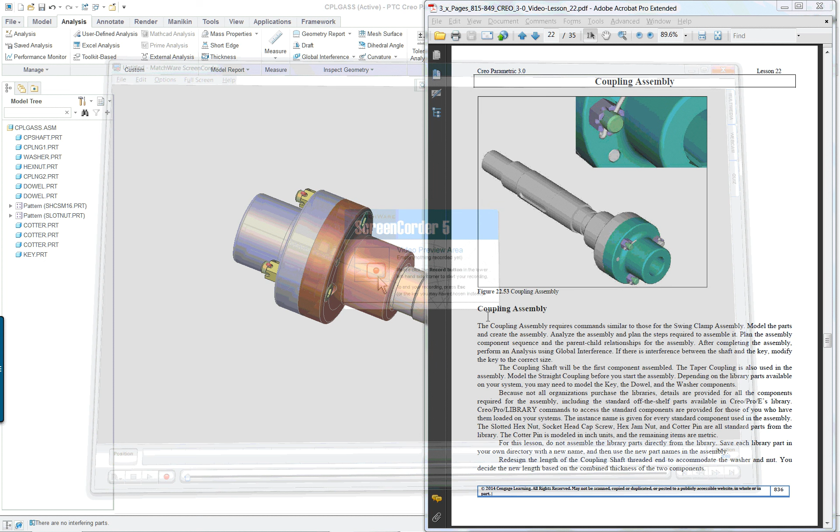PTC Creo Parametric 3.0, Lesson 22, Part 6.

In this lecture, we will cover how to do the coupling assembly. I've got it on my screen here, but one of the things we have to note is that some of the parts you created, which are the three main ones, and other ones are taken from the library of parts or from the CAD resources site. Either way is fine, but you should learn how to do at least the one from the browser and the 3D part space.

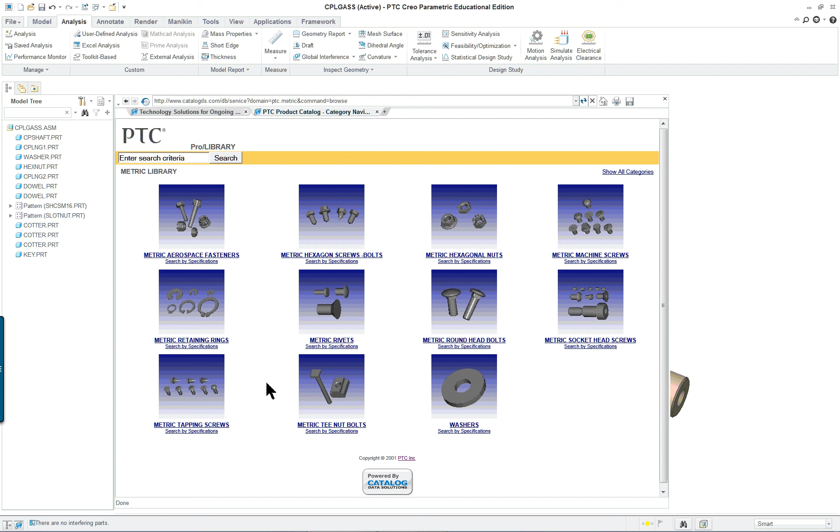Basically, we are going to be taking the parts from the metric library if you want to do it this particular method, and then you're going to select the category that you want to work with, washers, whatever it is. And if you look in the PDF, you'll see that the jam nut and the socket head cap screw, the actual path is given to you here. If you follow it along, you should be able to pull each one of these parts out.

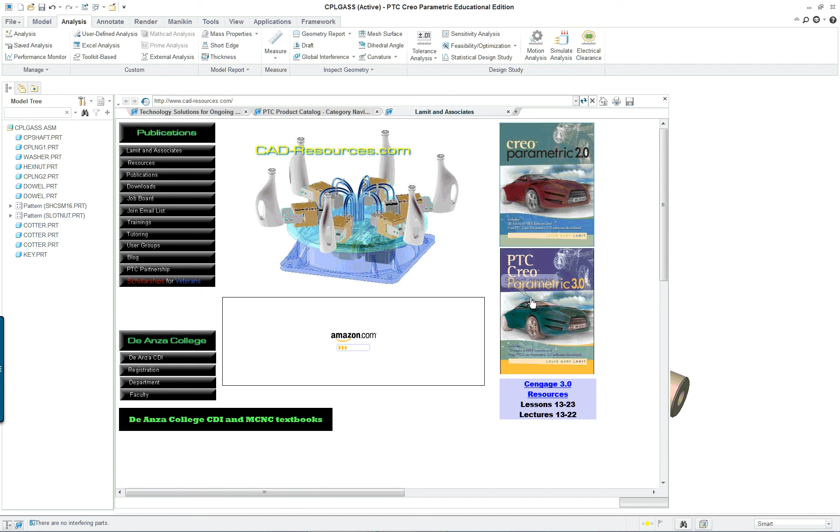Now, that's one method. The other method is maybe a little bit simpler in the sense that it's all in one spot. In the CAD resources site, go to it, click on the book cover, and click on the assembly exploded view of the coupling. Take this and extract it to your working directory, wherever that is. You'll see that those components are there for you to work with.

Alright, so I already have it in session and the components have been assembled, so we're going to take a look at each one of them individually, and in some cases we'll just redo it and see what we have for our options. One of the first things you want to make sure is when you put it together that you do an analysis at the end of it.

So we'll work kind of backwards here and we'll do a preview and we'll see if there are any interferences. There are no interferences. So as you do your assembly, you might want to run that analysis every once in a while to make sure you're getting the components in there correctly.

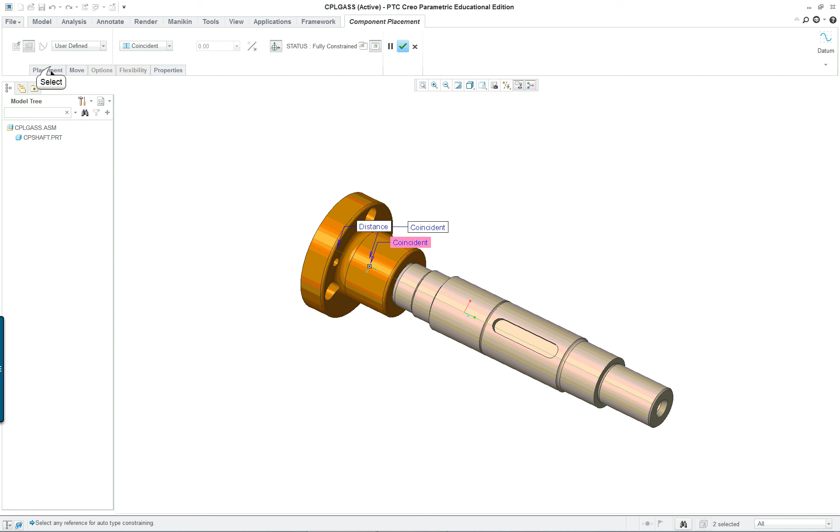The first component that's going to go in the assembly is of course going to be the shaft, and then the second one is going to be the taper coupling. So let's go and edit the definition of that one and take a look at the constraints that were used for it.

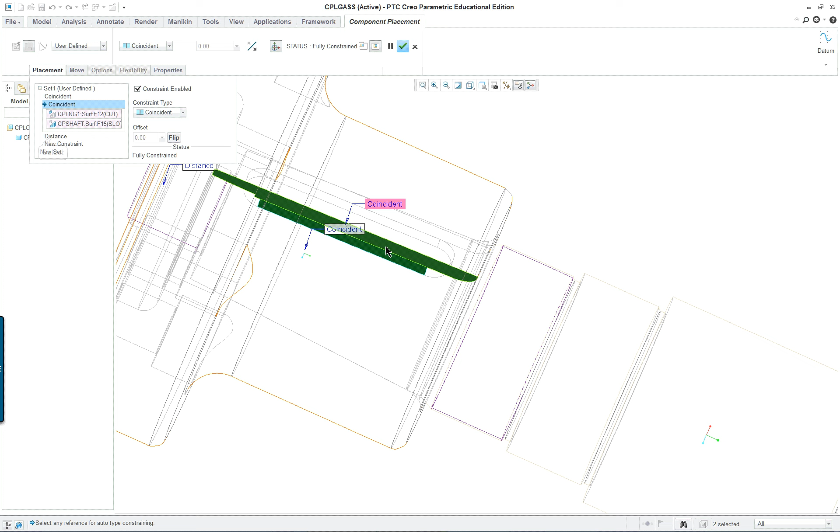Change this into hidden line, and you'll see that the first one is coincident, which are the two tapered shapes coincident with each other. Then you have the key seat coincident. And then you have a distance one, because we found that we can't get this in there unless we have a distance. Now this is going to be put in there and then eventually screwed down. There's going to be a nut here on this end. So in reality, it doesn't have a precise fit in that sense.

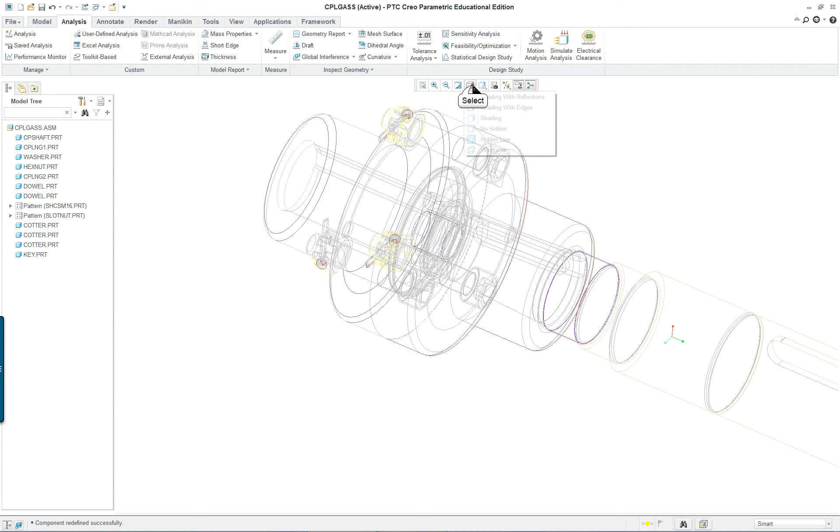So we looked at those, and let's put them on our own. We can do that by taking these and suppressing them, like so. So it's probably a good idea to have your tree filters so that you can see your display items here and maybe suppress them also. I have everything turned off, so I don't have any of my datum features shown.

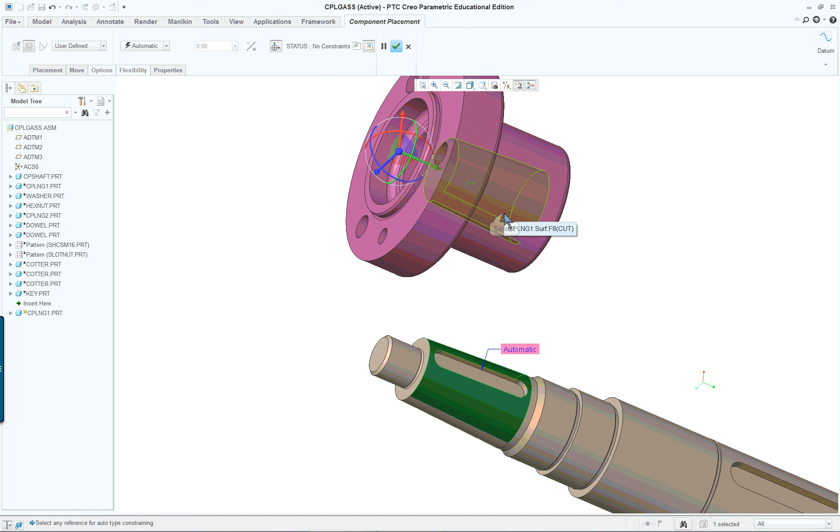So let's go to the model. We're going to assemble the coupling number 1, which is what I called it here, the taper coupling. I'm going to click on the face here for the taper area, and then with my right mouse button filter to the same thing on the coupling. That's one.

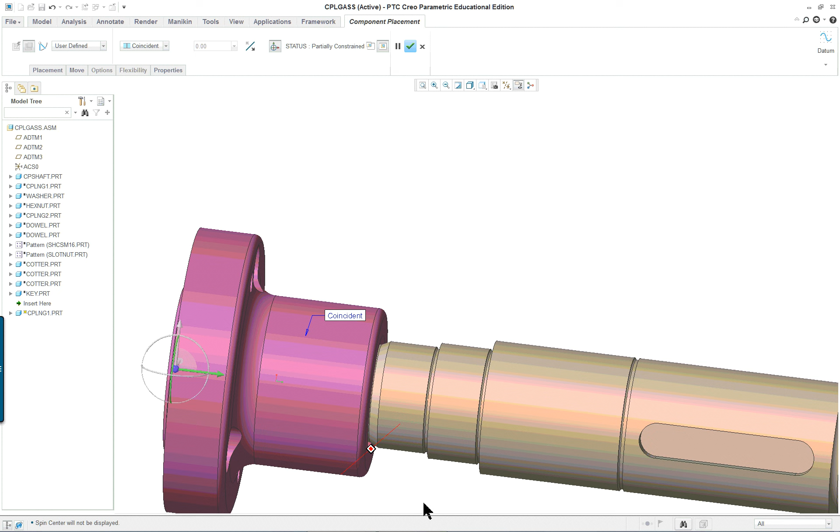Okay, now we also have to index it. If we look, we can see it's not going to go on there perfectly. Now I'm going to turn off the spin so that when I rotate it, it'll rotate right about that position. One of the things I could do is drag this out, but the funny thing is that the coincident constraint doesn't seem to attach itself very well, conical shape to conical shape, or taper to taper.

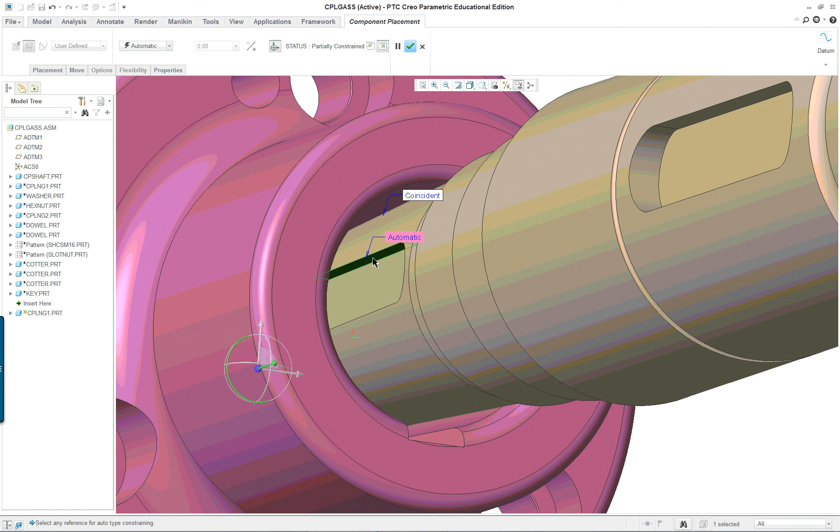So I'm just going to drag this out and take a look, and you'll see that there are two key seats. So we're going to add a constraint to this surface of the key seat and to the one inside here. Let's see what we get when we do that. We got normal, so let's try parallel.

We'll see that they do line up at that particular point. All right, so we have that one in there. We're going to want to add one more constraint here, from the end face here. There's a variety of places we could go to. Let's pick the very outside so it's easier to see.

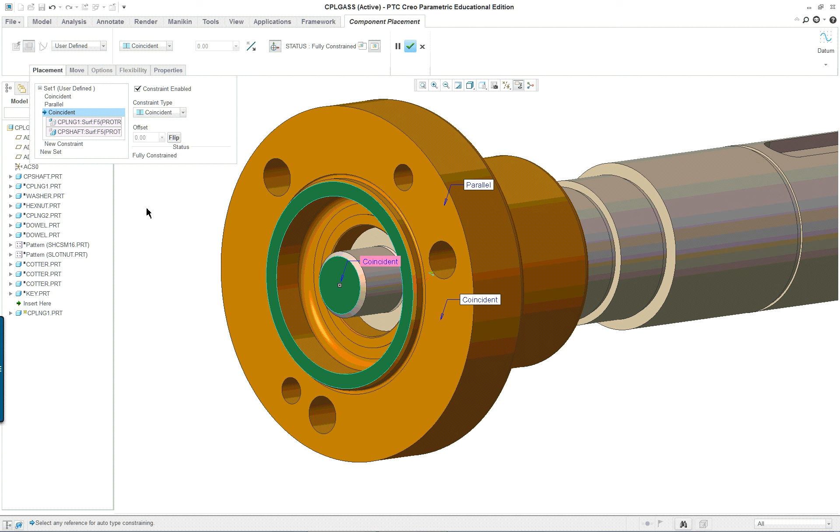Now, if we stop there and did an analysis, we might see that we need a particular distance. So I'm going to go into the tools, into the analysis and global interference, and see what we can come up with. Well, it's not giving us any interference, so we're kind of lucky at this particular point.

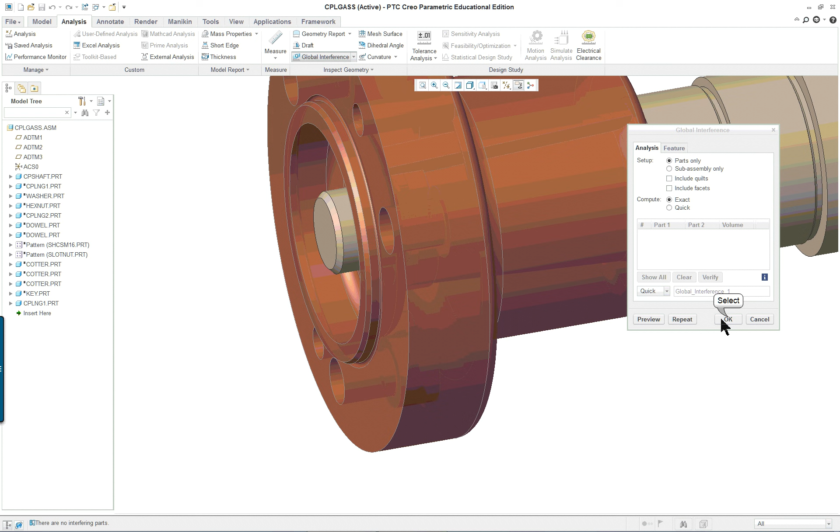If you do get an interference, then you must add a distance to it. In other words, change it from coincident to distance. So I'm a little surprised that that worked out so well. What I want to do is visually test to see if this is working.

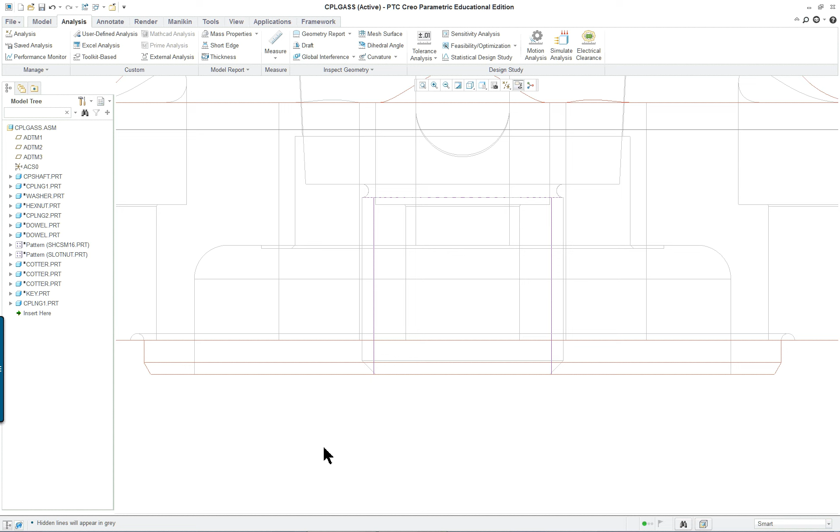And I'm going to go in and click on front, and I want to zoom in very, very far to see whether or not - where the two items meet. And you can see right in here that it does have sufficient room and it's not intersecting.

So again, you'll do this analysis, and if you do have a lot of red showing up, then what you want to do is change the distance or add a distance to it.

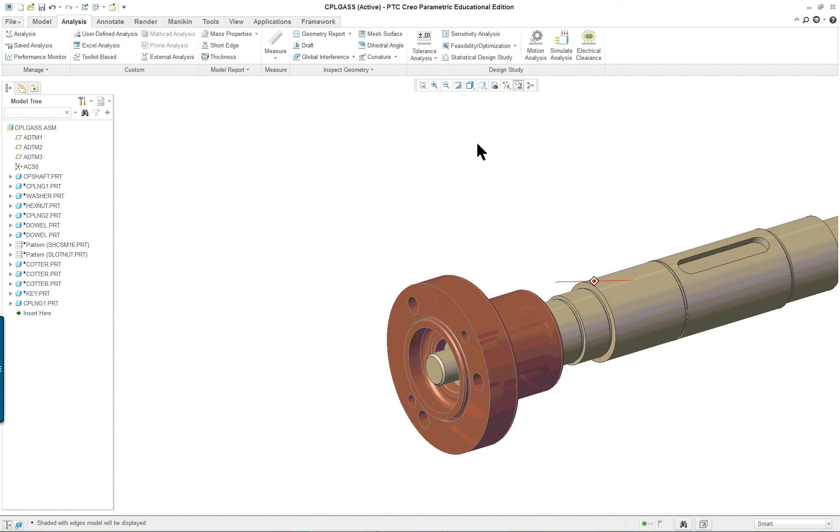All right, so let's move it around a little bit. And the next one we could put in - I'm going to go around up in here. Let's say we want to go and put the key in up over here.

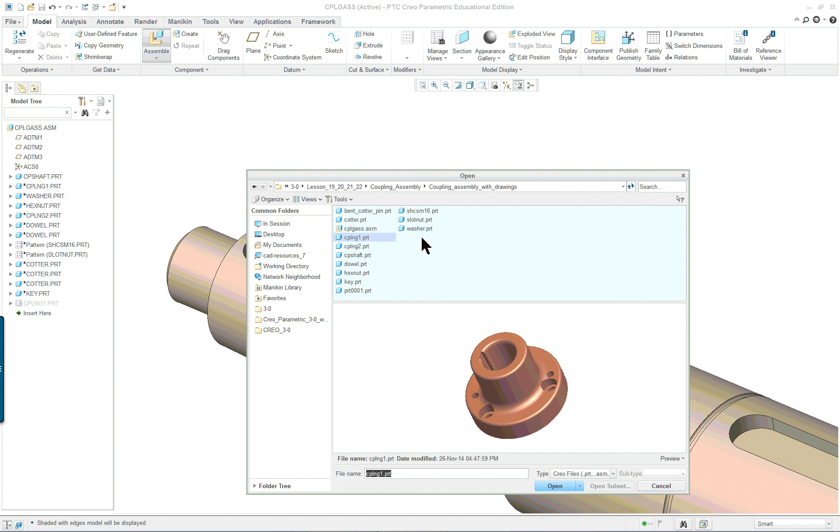I'm going to just click on this and hide it so I don't have to deal with it in front of me. And we're going to go to Model and Assemble, select the key, and the key - I'm going to pick the face here and the face here.

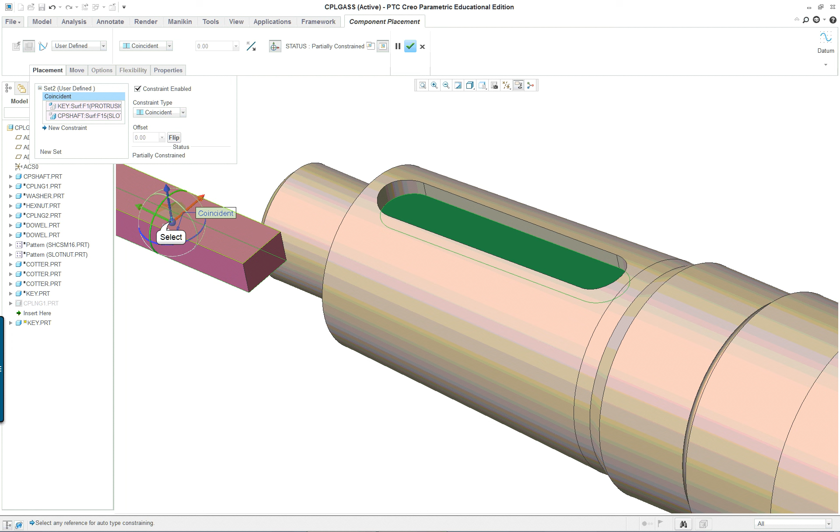Let's make those coincident, and let's flip it, see where it is. Okay. All right, just move it over in here a little bit.

So that's coincident. And let's add a new one. How about this face of the key to the face of the key seat? That's also coincident. Let's add one more.

We want to know where it's going to slide in here. Let's change the filter to edge and click on the edge here. Let's see if it'll pick the edge. There's the edge, using my right mouse button. You can go down and change the filter instead. And that one's coincident.

And again, in every case, you should see whether or not these are properly sized. And we'll run an analysis, global interference, again. And it looks like it's okay. All right, so that's our key and our coupling.

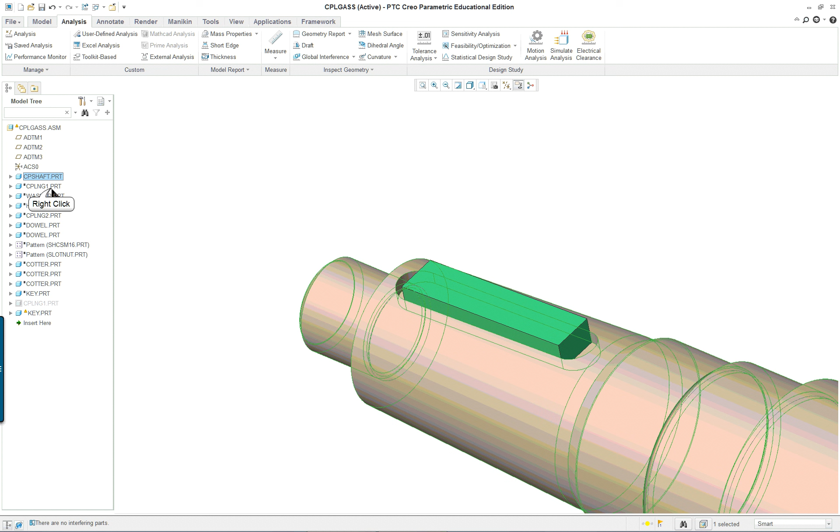Let us - where is my coupling? Let's unhide it. Rotate it around. And let's put on the washer that goes in here.

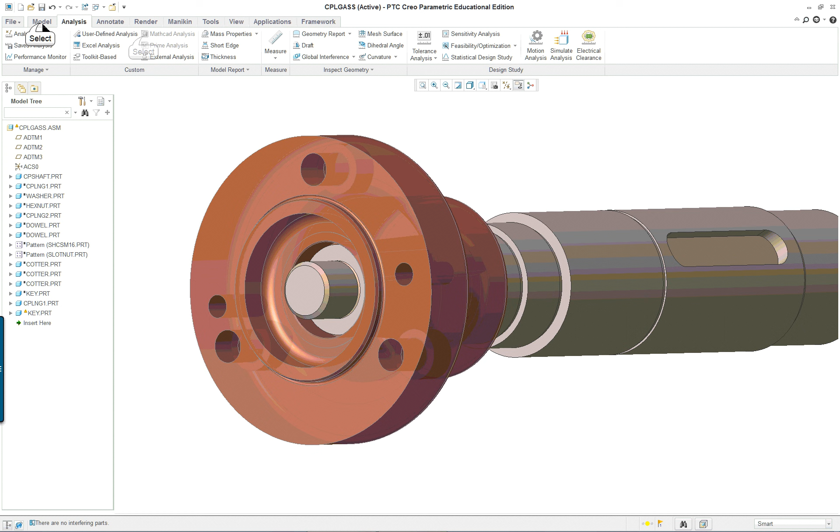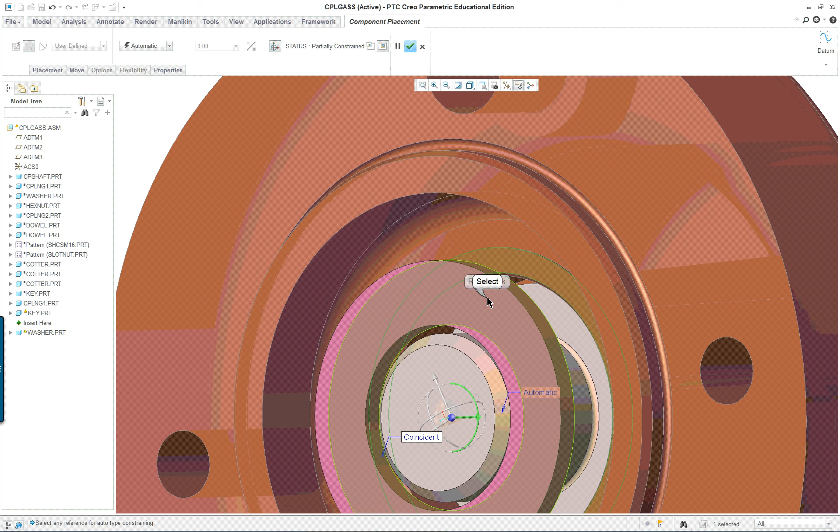And I'm going to select the curved face inside and just the threaded area here. You'll notice that it's very sloppy. I'm going to also select here, the bearing area, and you're going to need to open this up and get a size on it.

Open up the part and measure this first and find out what it should be. Obviously this is very sloppy - we won't do that. So we do want you to go in and measure, see what's going on with these differences here. This one is saying that it's 30.

By the way, it is metric, so you have to pick metric when you create this. And this is 33, so you can see this is very large. So if I activate that - double click on it - there's 33.

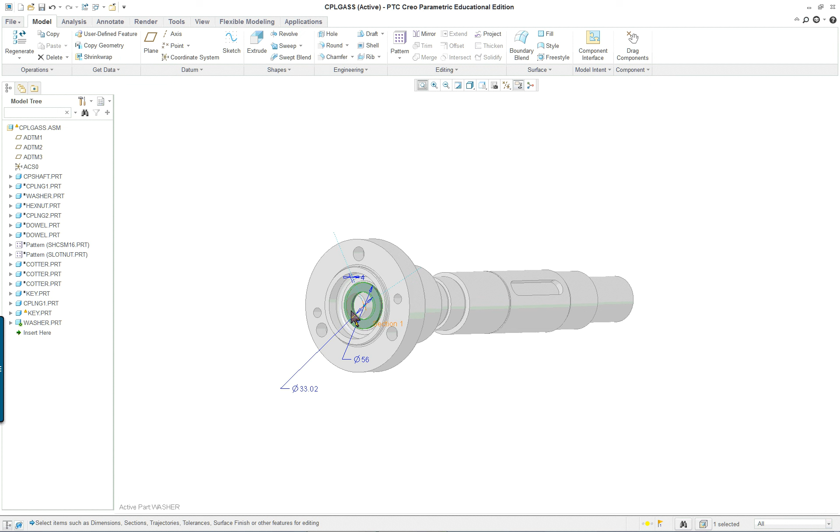And make that 30. Regenerate. Activate the assembly, so change the size there. Next, we want to put on the other coupling.

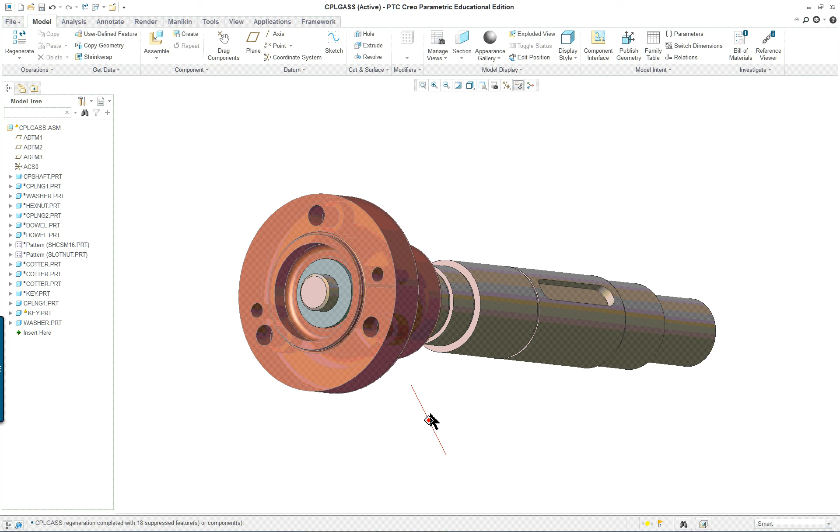So assemble coupling number 2. And on this one, we could actually pick the face here. This is going to be flipped.

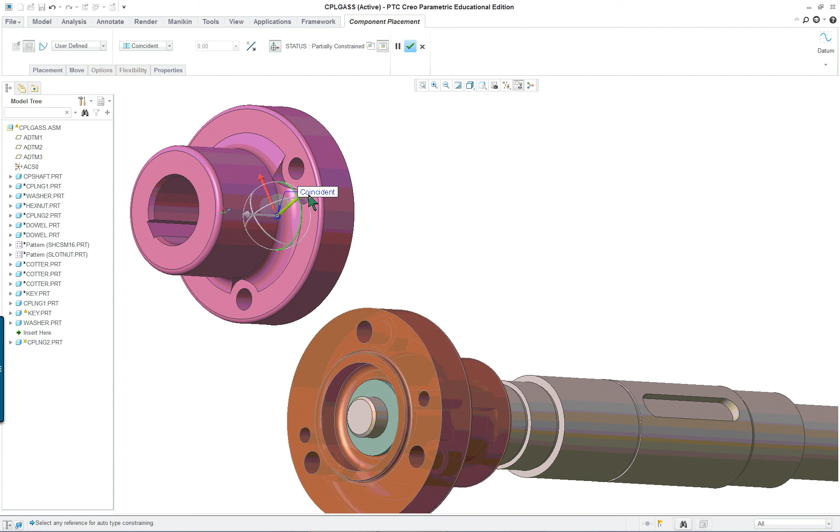And then we can pick one of the dowel holes on each side. So for instance, let me pick this one here and pick one here. It's smart enough to know that this is approximately what it should be. You can see that it's not completely aligned. So we add one more, dowel hole to dowel hole, and it is fully constrained.

Let's see what I have here for a view. Nope, don't want that. So, primary larger components are in there, and I think I forgot to put in the nut.

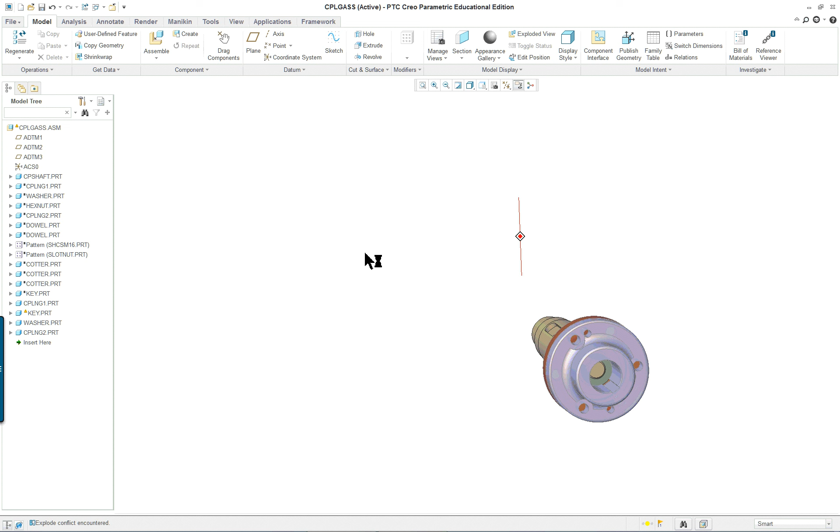I did, so not a big deal. We just go over to our, we got the coupling. Let's go to the first coupling and hide it again. And actually let's hide the second coupling also and see what it looks like.

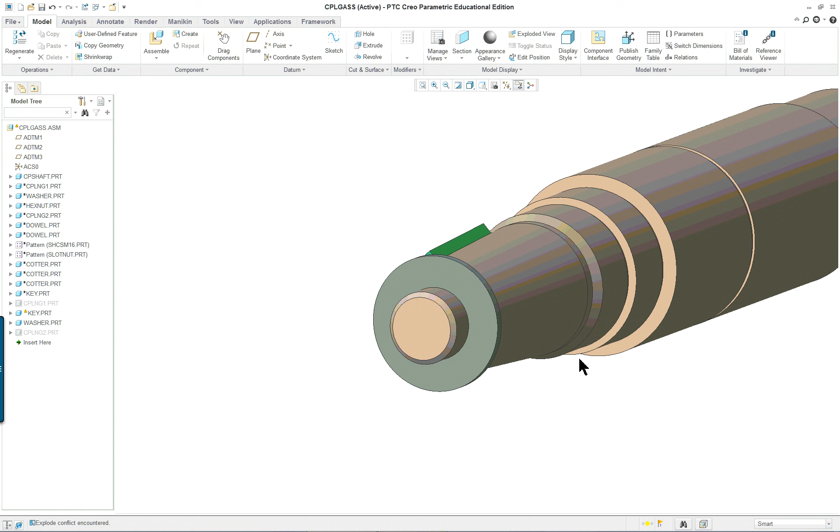So at this point we could assemble the nut. How come I'm not seeing it? Oh, right here, sorry. I'm just seeing it being listed as a hex nut.

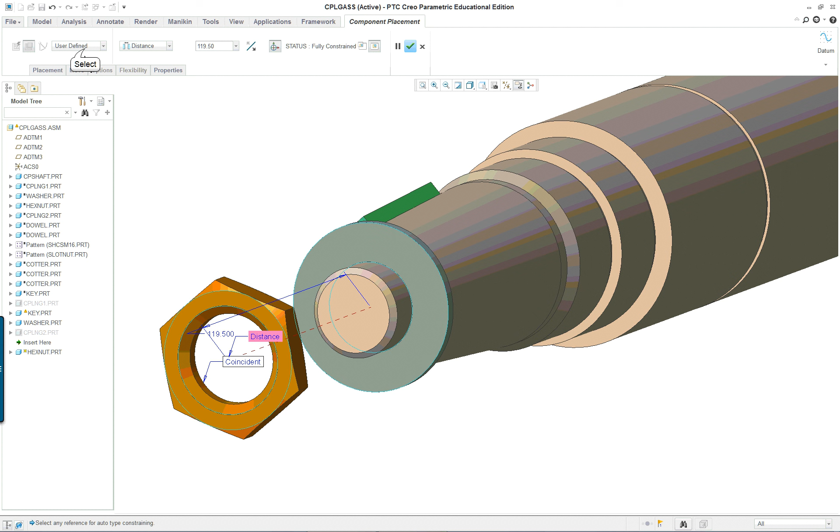We'll pick on the curved threaded area, same thing on the nut. And then on the bearing face, this will be coincident. And flip it. And that's complete.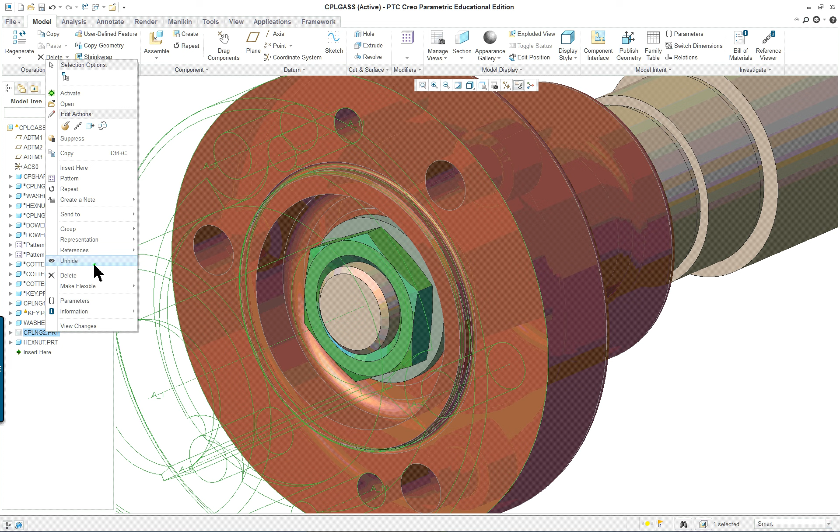And bring back the coupling. Unhide. And bring back the other coupling. All right, so as far as the dowel pin goes, assemble the 2 dowels.

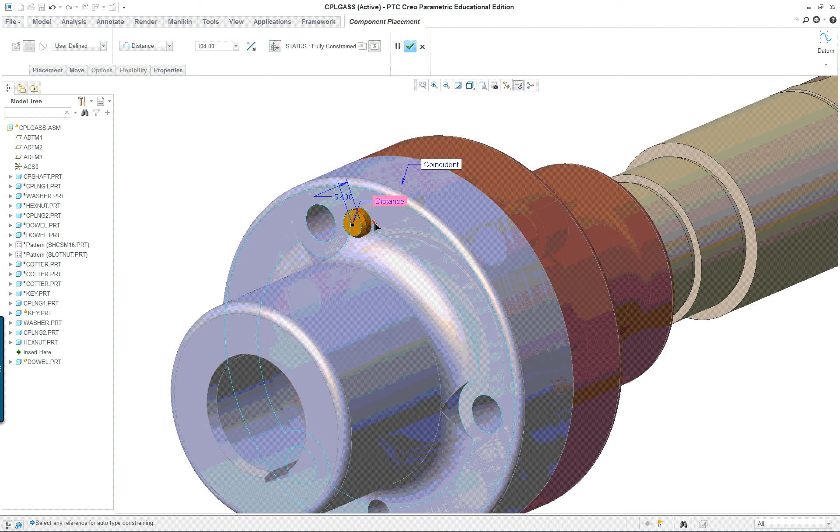Guess we'll put it in here. And I'll pick here, and the face here. And you can keep the distance and slide it in. Too far, actually might even be too long.

Let's try to see what happens if this is coincident. Oh, looks okay. All right, check, and with the dowel, let's pattern that.

It should come back and say, oops, it's failed. It doesn't say reference pattern. So when this set of dowel holes was put in, we did not obviously make a pattern, so we can't pattern that item.

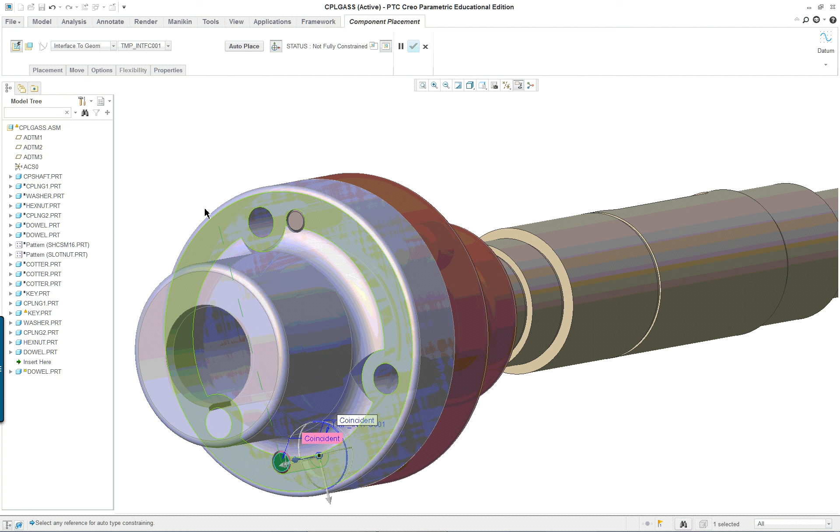Now we could go Control C, Control V, and it's looking for another hole here. We can pick on this one here, and everything else should be the same. There we go. So we have our dowel pin in.

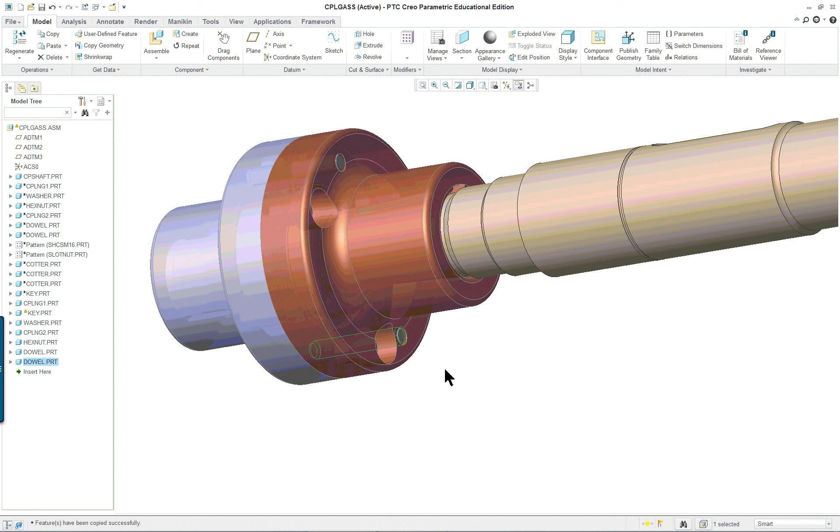Next thing is putting in our socket head cap screw. Rotate it just a little bit. Zoom up. So assemble, get your socket head cap screw.

Let's open up the window here. So let's pick here and pick here. And then we can drag this to the other side if you want. And obviously we are going to add another one and bring it out a little bit farther.

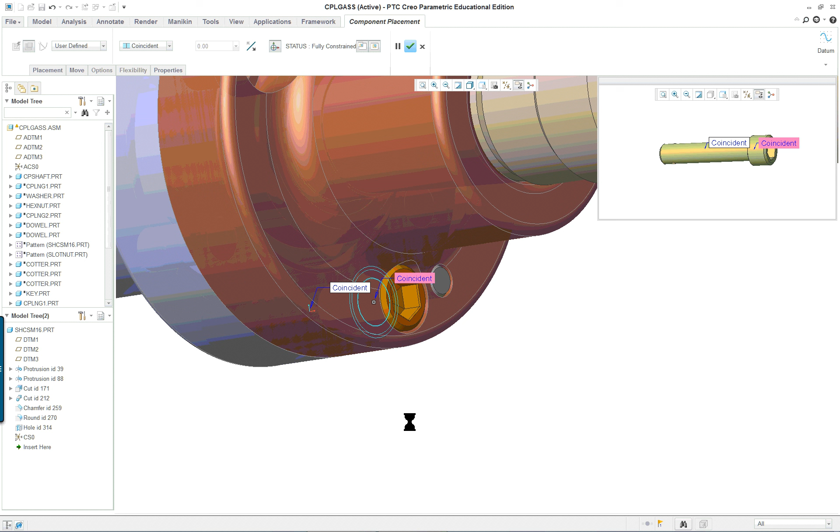Could flip this obviously, but let's add new constraint, and let's select the bearing surface here and the counterbore surface, and let's flip it like so. And in reality we could add another constraint here.

I'm going to go over and turn on my datum planes. Ooh, kind of a mess. And new constraint. And it's going to be pretty tough to select this.

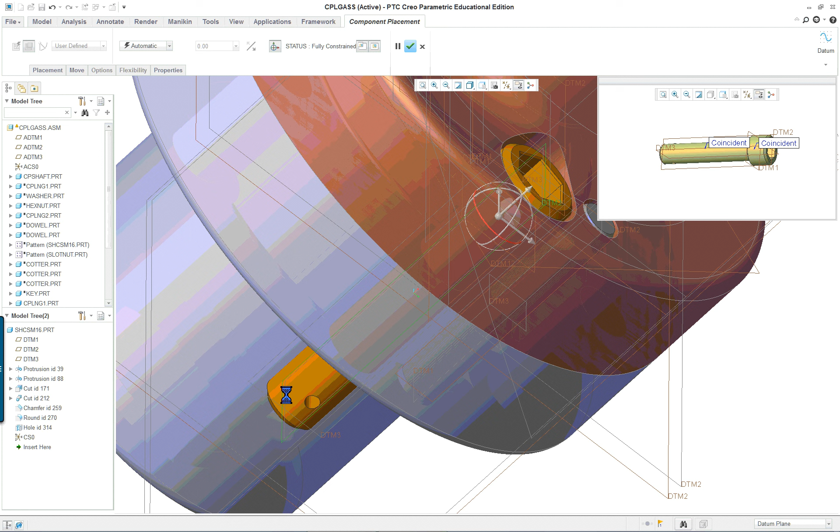What we want to do is get a plane going down the middle of the socket head cap screw. So I guess we could come over here and say datum plane and select this one. And we want something to reference on the other part. Let's see, that one goes down the middle. This one goes perpendicular, I guess. Let's see if we can get it to work.

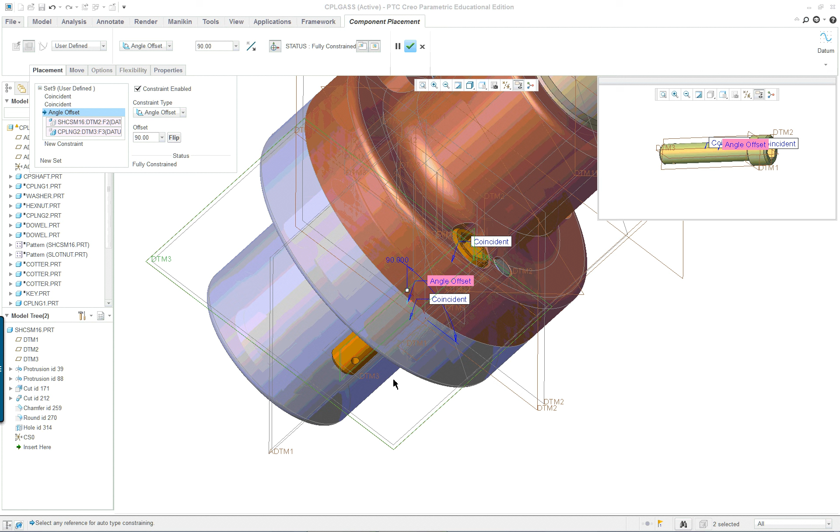And placement, and we will, instead of normal, we'll put angle offset. And that allows us to turn so that our hole can be placed in a certain way. Let's turn it out so.

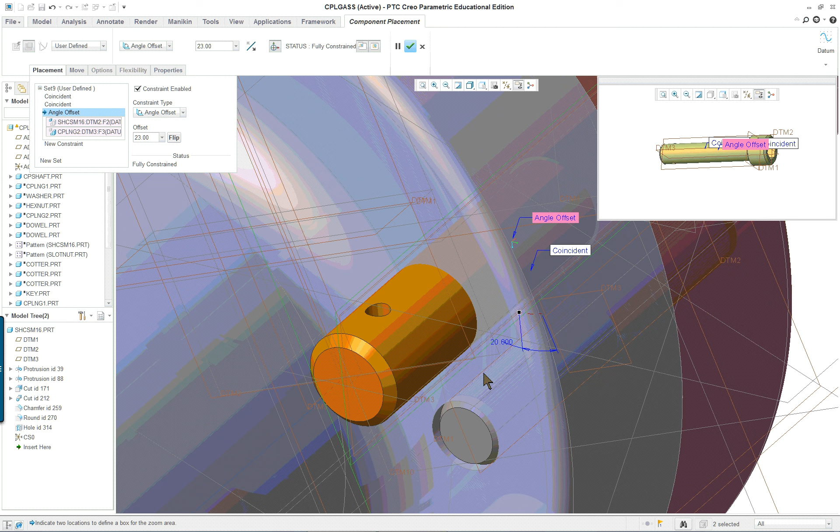Very slow for some reason. And it's fully constrained. Middle mouse button.

Something's wrong, I forgot to index this correctly. I put in coupling number 2, but I put in dowel pin to dowel pin. I really should have matched some of the other items in here. Let's turn this off. Interesting, never did it this way before.

I have this one on incorrectly, so let's edit the definition of that, and on placement, let's remove this one, and let's remove this one like so.

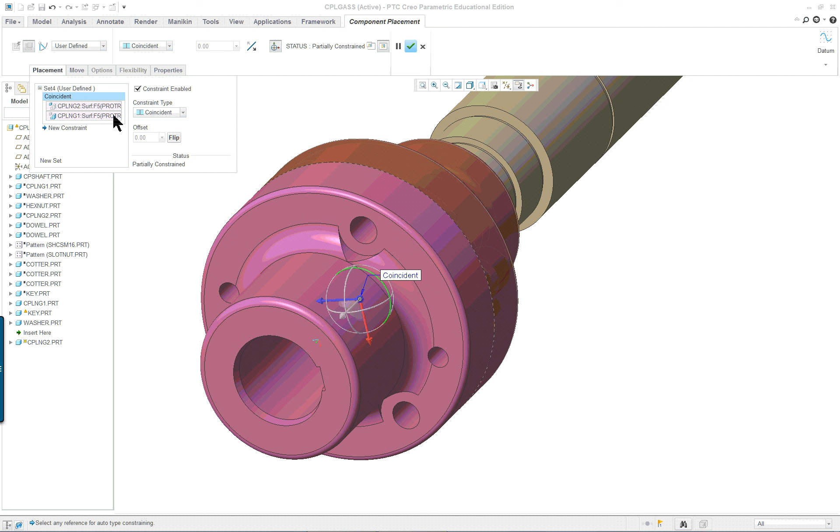And so we have coincident. I think what we should do is turn on our axes, add one. Let's delete all of them, and let's pick axes.

And then the axes going down the middle here, let's start off with that. And then a new constraint, let's go and pick.

We could pick the axes here also, and then the axes in the slot. This here is in the hole, so let's see what happens if I pick this one.

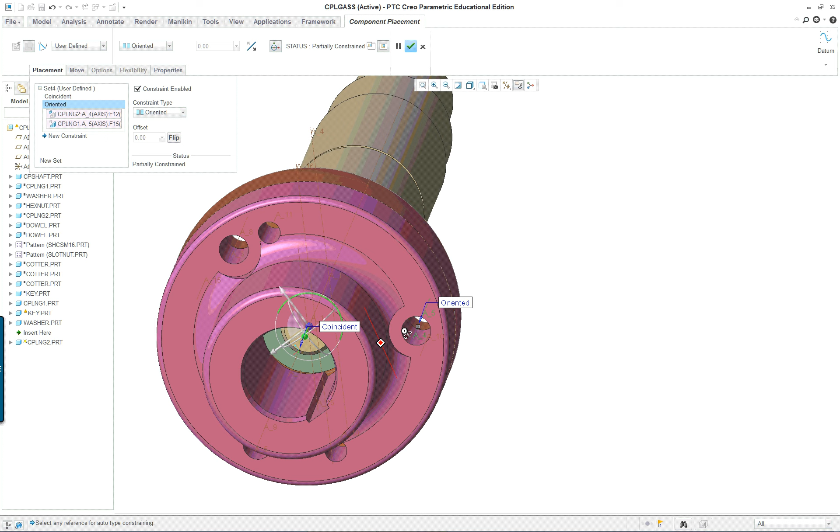And they look lined up. New constraint. We do have one more direction we have to control, so I'm going to pick in here and right mouse it in here.

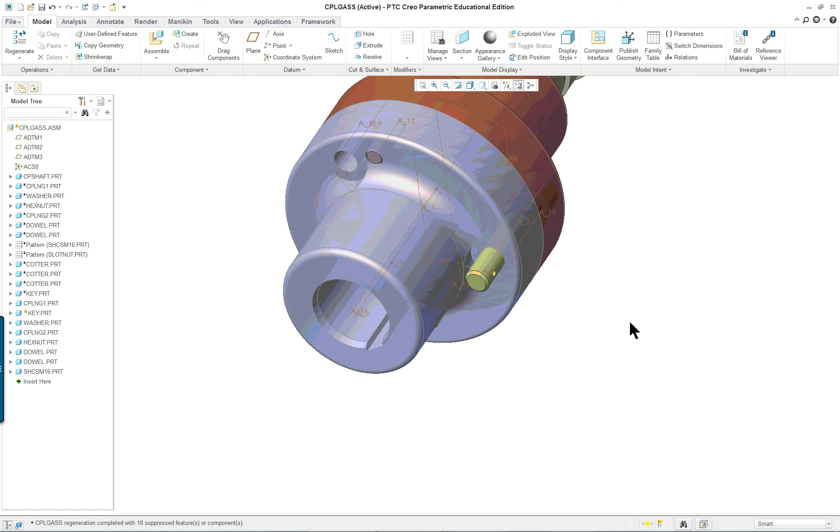So let's see what happens when I do that. It seems okay. The only difference is I do want to go back over to my screw and check that angle out.

Let's try 90 and see what happens. How about 75? It's even worse. So I think visually is still the best way to do it here.

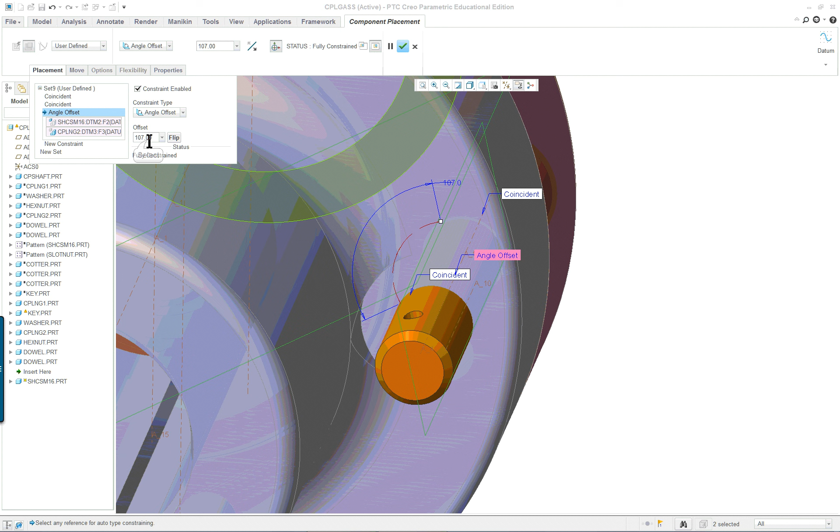Oh, it looks pretty good. Maybe a little bit more. We could try 107. That's what it should be.

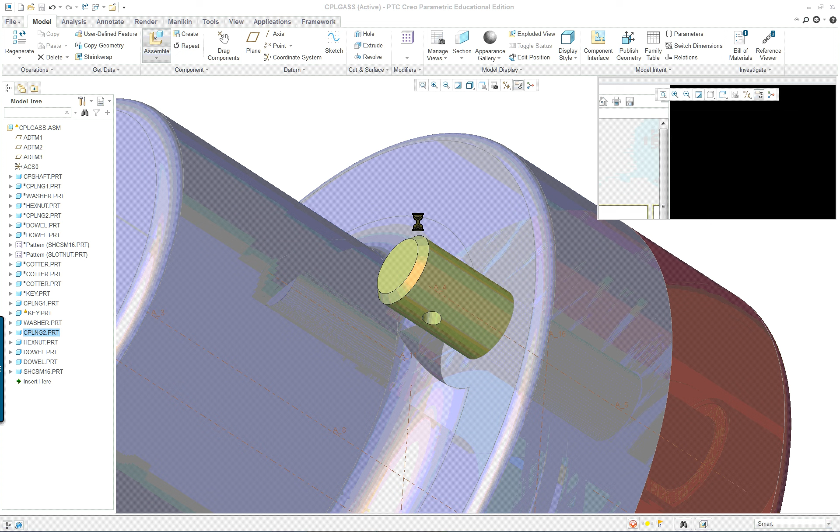So next we want to put on our slotted hex nut. Let's work with it here. Let's pick this bearing surface and the bearing surface in here, and then select the thread surface and the thread surface of the screw.

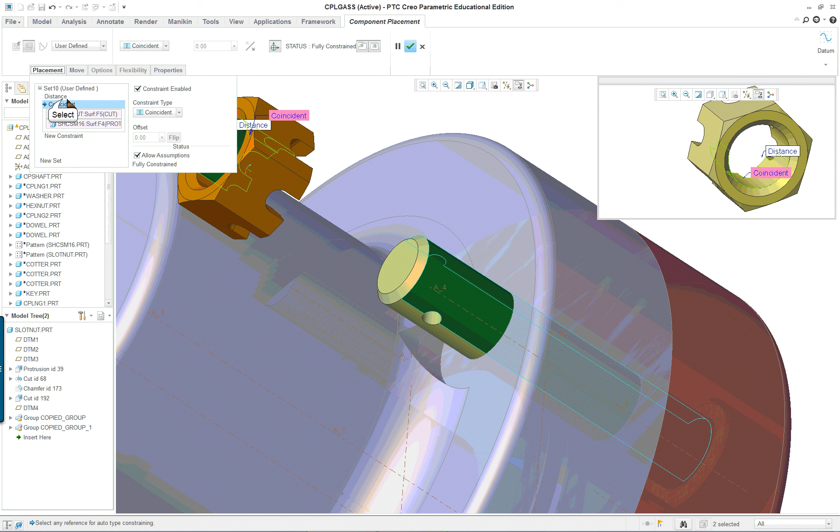And let's flip the constraint. Oh, should be flipping. The distance here, this should have been coincident. And flip, like so.

And we'll try, and we'll add one more, hopefully. Click on here, and click on here. Oriented, about coincident—doesn't like it. Parallel. Well, let's try parallel. All right, looks good. Anybody who's an engineer would know that you're not supposed to put a cotter pin on

Moving pieces of equipment like this, but, well, this is just for practice.

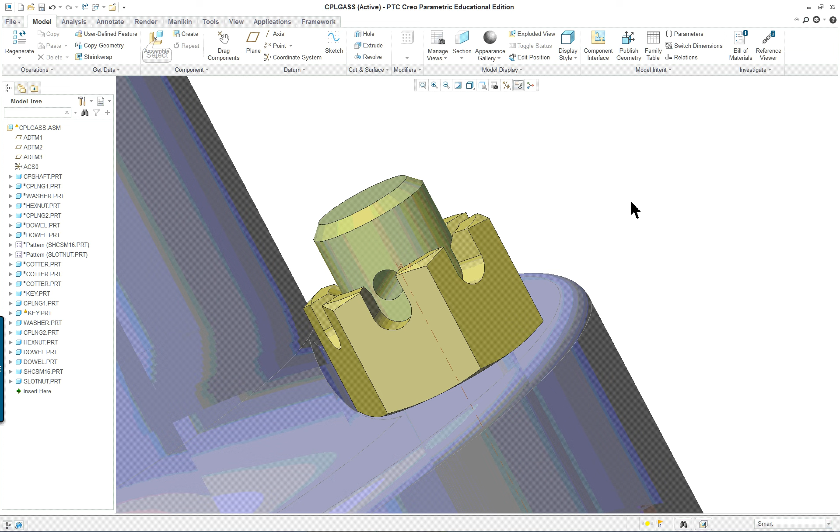Assemble. Cotter pin. We'll pick the surface here, and the end here. And we'll—can't pick this. These have a slight curve to them, I found out. So I'll turn on the plane here, and hopefully pick on this one. It says it's

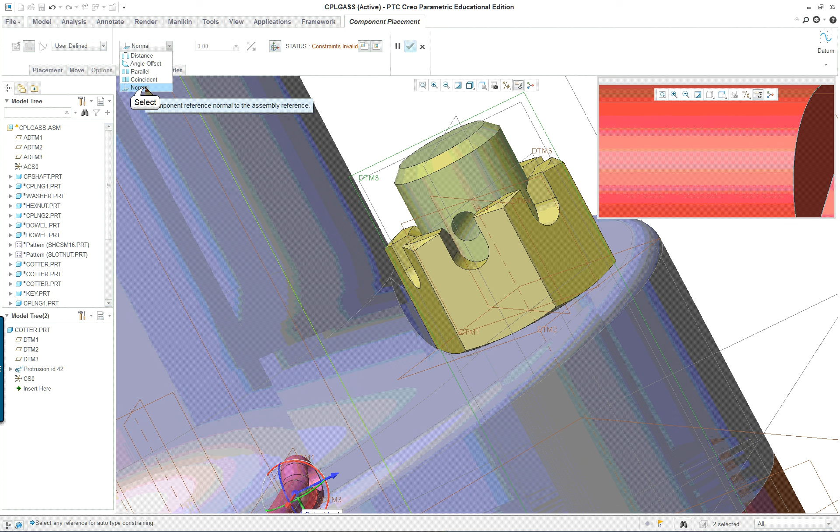Invalid. Let's, how about normal? No. Parallel? No. Distance. There we go.

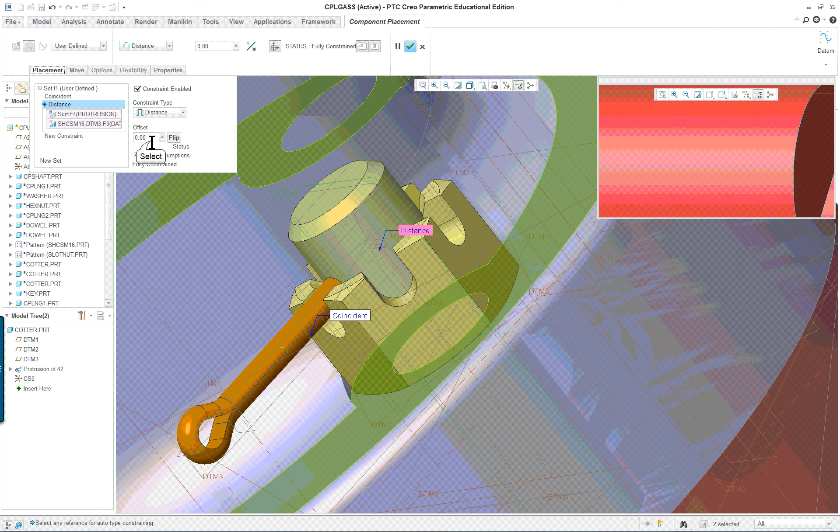Let's see what we've got. So we have a distance here. We want this to be, let's say, I'm going to go 25 and just hit enter and see what happens. Oop, a little too much. Like so.

And check. Now, what we're going to do is something a little bit different. We're going to activate the Cotter Pin.

And we are going to edit the definition of its trajectory. Your dialog will be different if you've done it like this. Well, maybe not—maybe you're going to come up with the exact same thing. Done. And go in here like so.

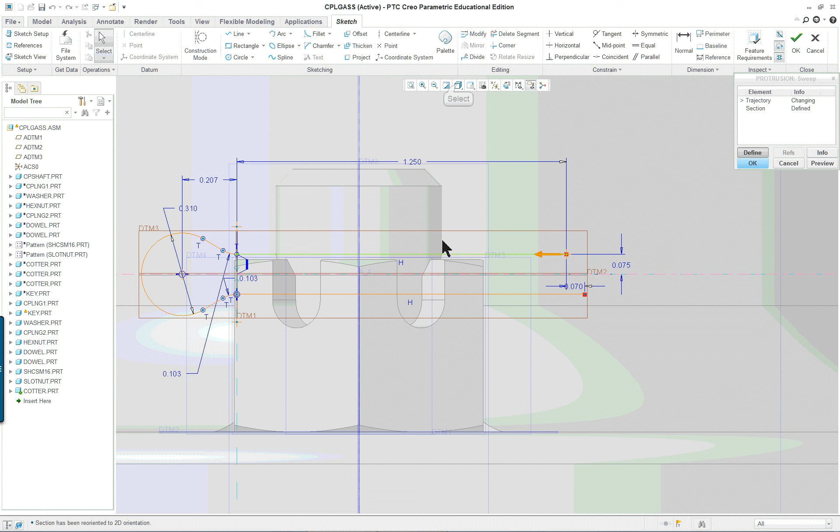Hope you can see it. So we've got the section in here. And what we're going to do is we're actually just going to add a curve on the end here. In other words, we're going to bend it. I think I'll drag this in.

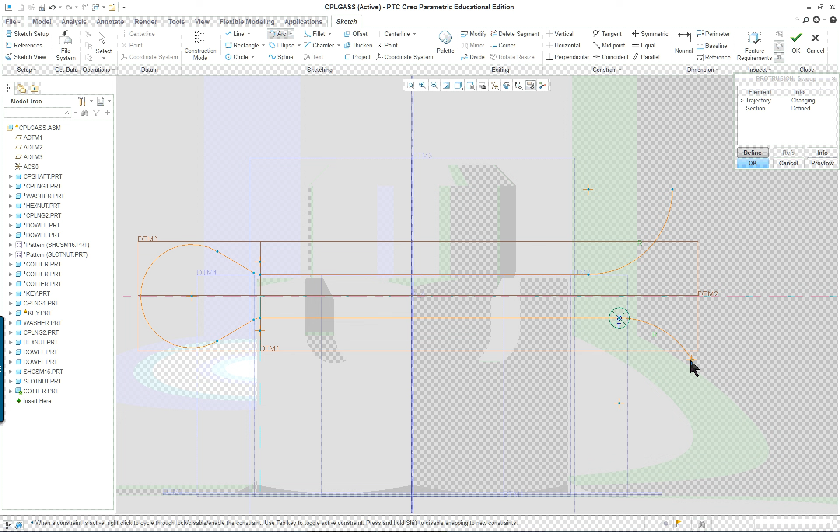And let's go up to arc and pick on the end. Like so. Pick on the end. Like so.

Incomplete. Doesn't like me for some reason. Open sections—the start point must be the end point. I'm not sure what it's telling me here.

Huh, never had this trouble. Oh, I'm so sorry, I still have my starting point here. So if I click up on top and make this the start point, it should work now.

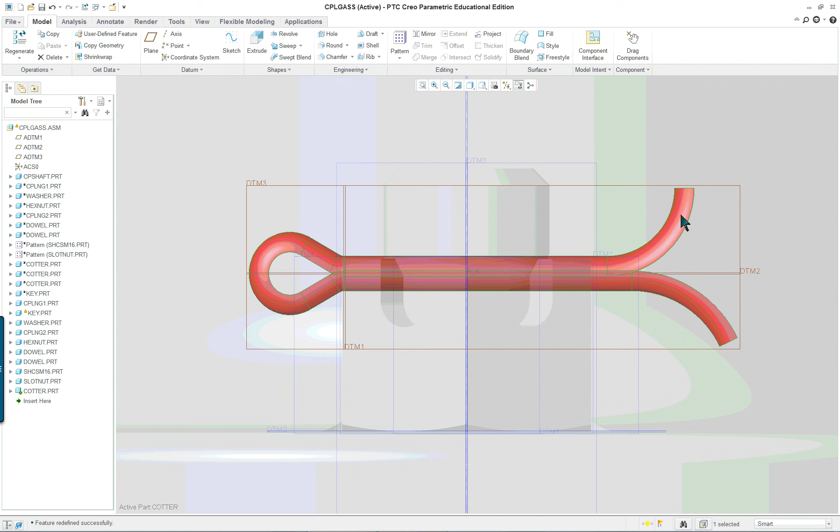And let's just do this one a little bit different shape. Check. Okay. And you can see it. Kind of cool.

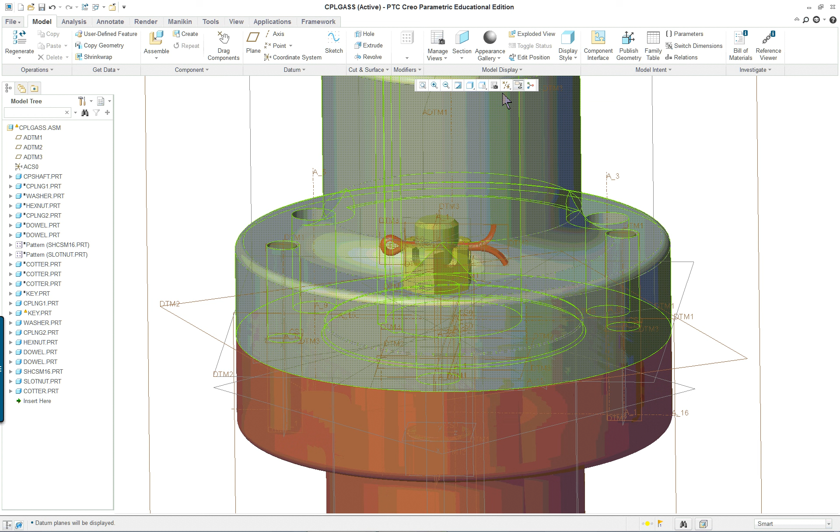Let's activate the assembly and turn off the datum features. Very slow—going faster than it wants to go for some reason.

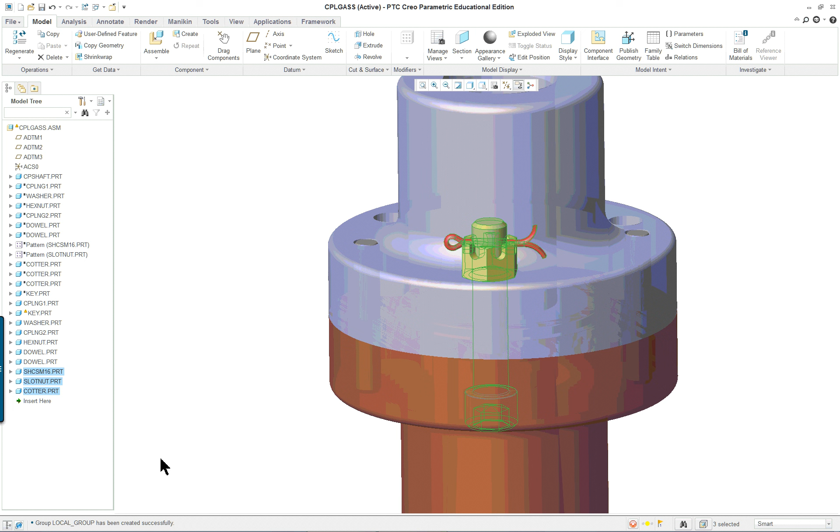All right, and there's your Cotter Pin in there. It's bent. Now, what you should do is take those items—Cotter Pin, hold on your control key, slot nut, and socket head cap screw—and make them into a group. And with any luck, you group them and then pattern them.

And it should say reference up here in the type, because that was put in with the pattern. Check. Oh, everything but the Cotter Pin went in correctly. And this does happen—I've seen this happen before.

So one of the things we could do is go to the original one and try to back it off. Also, if you notice, the angle changed a little bit. I'll take that back—the angle is okay, it's just up in here. But you're going to have to change the... let's go back in there and go into edit definition of the Cotter Pin.

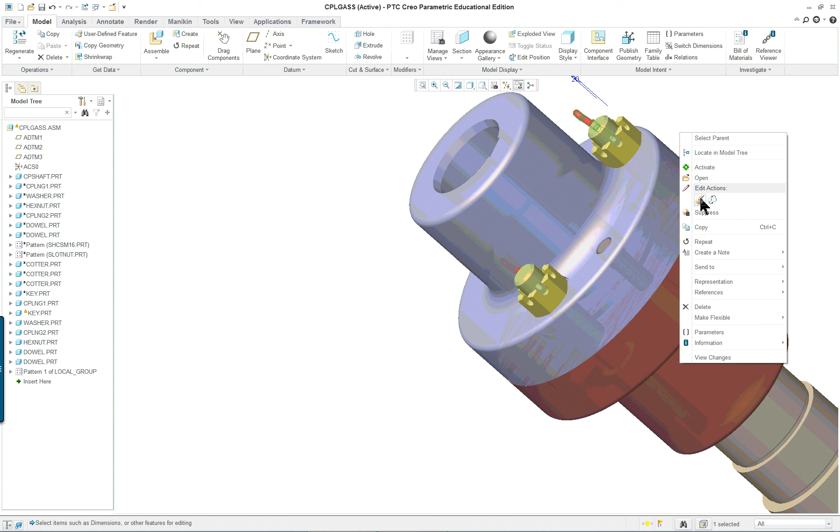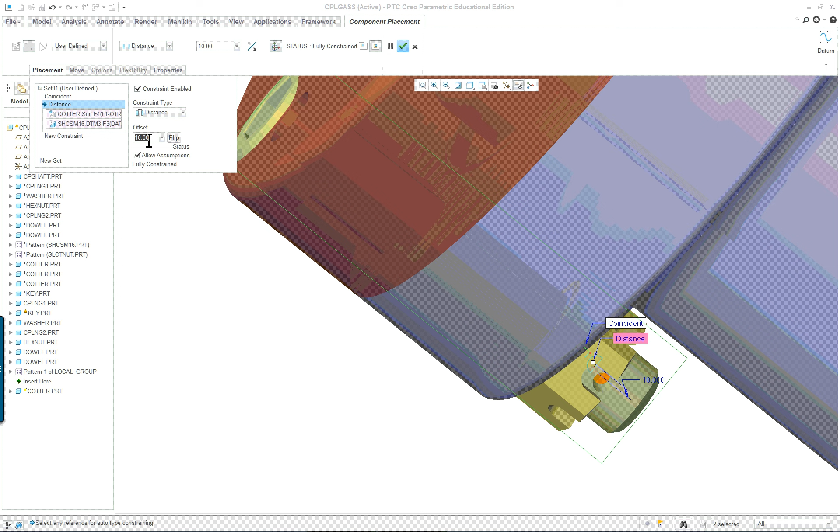And see the placement and the distance, see what's going on with it. Offset 10. I just want to go to 0 for the one, see what happens. Okay, I did -5. How about -10? Correction, how about -20? Okay, now it's coming out again.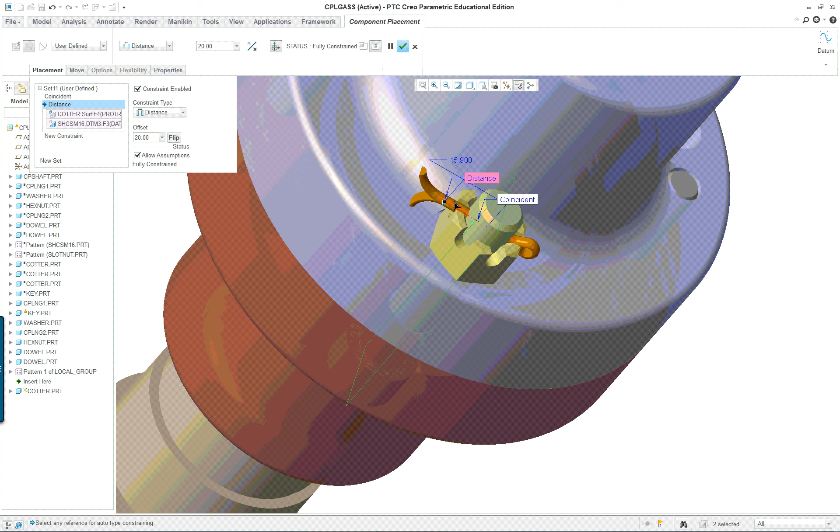It's a little too far, so let's try to get back a little bit. Seems to be okay. Check. I don't know if all of them are going to go back in correctly. What's going to happen, I think, is we're going to get some of them hitting inside here.

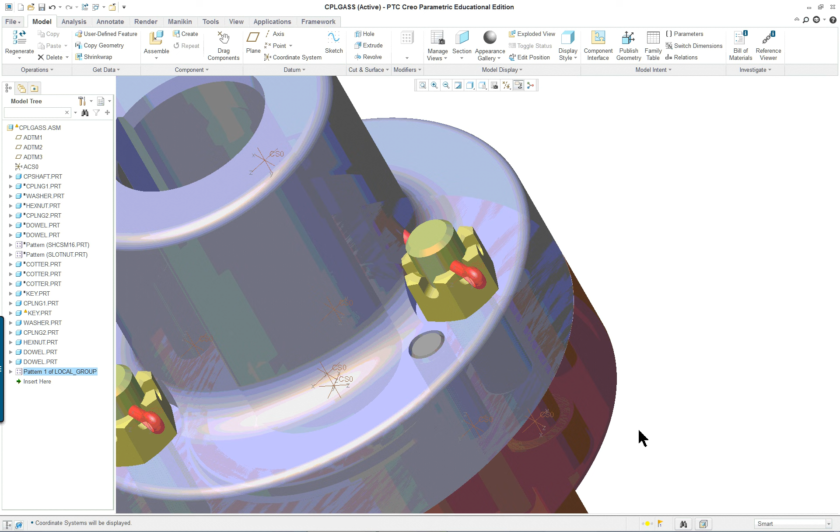So let's move this over and let's zoom in like so, and let's turn on our coordinate system. We're going to need that. Let's see both. Okay, here's my coordinate system down here. And I think, if I'm not mistaken, the x-axis goes down the middle of the socket head cap screw.

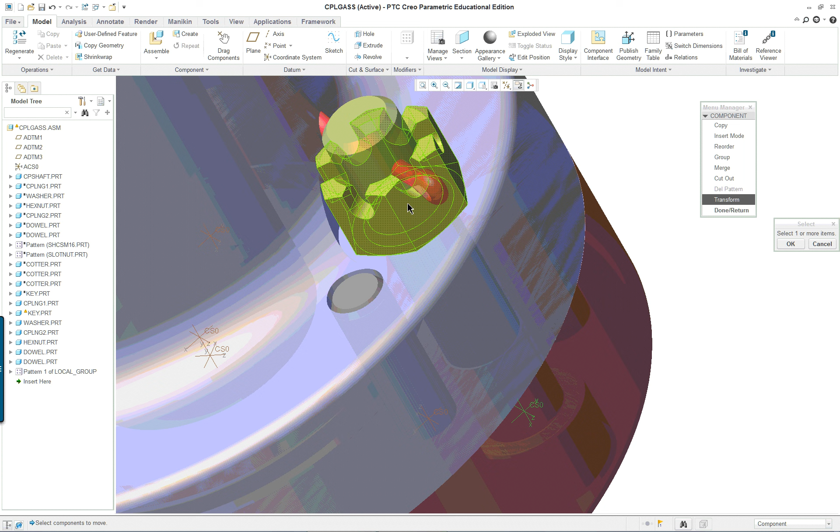So there's a set of commands, component operations. The old menu manager will pop up. We want to transform. It says select a coordinate system. I will select this one. And then select the component you want to rotate. I'll select the parent here.

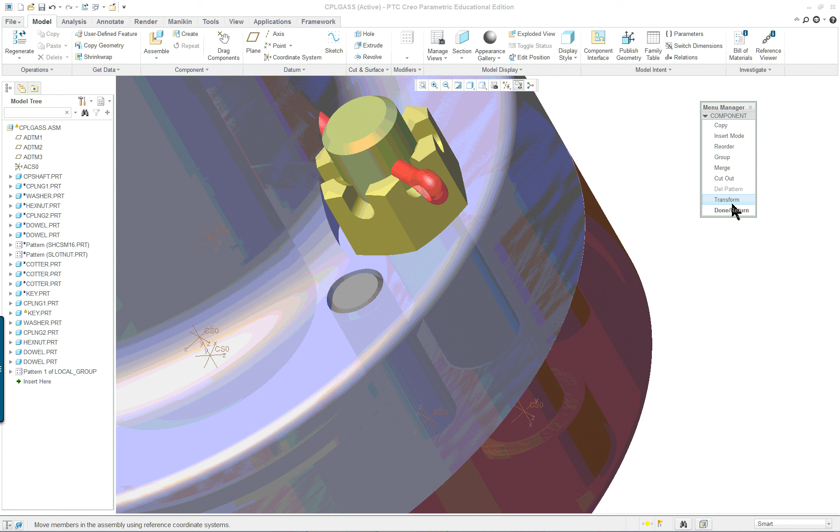And OK, rotate, and we want the x-axis, and well, I'm going to guess about 45 degrees. You'll have to experiment with this to make it work. Done, return, done, and regenerate.

And it turned it. It says it didn't like where my key is. Oh. Okay, something's wrong with the key, but regardless, you can see here now we have these facing separate positions.

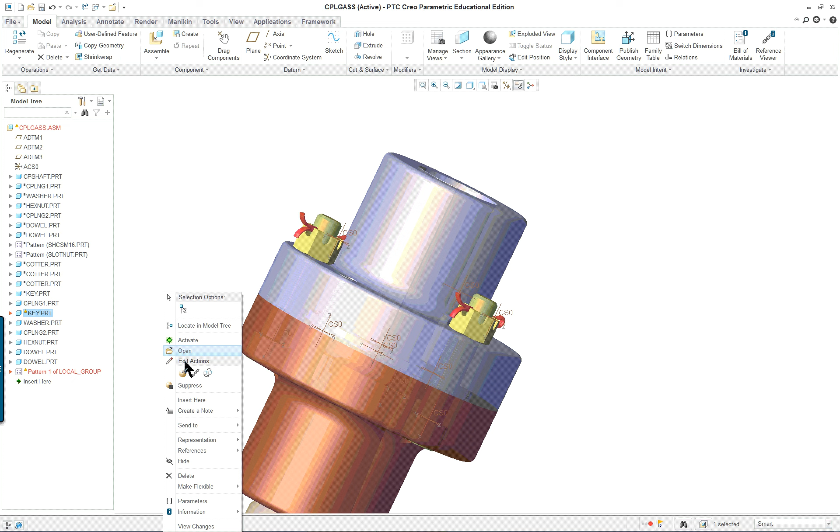And the third one seems to be okay also still. So we've moved those. Something went wrong with my key. I don't really know what it is. So I could go in and I could investigate. Edit definition - doesn't like something in here.

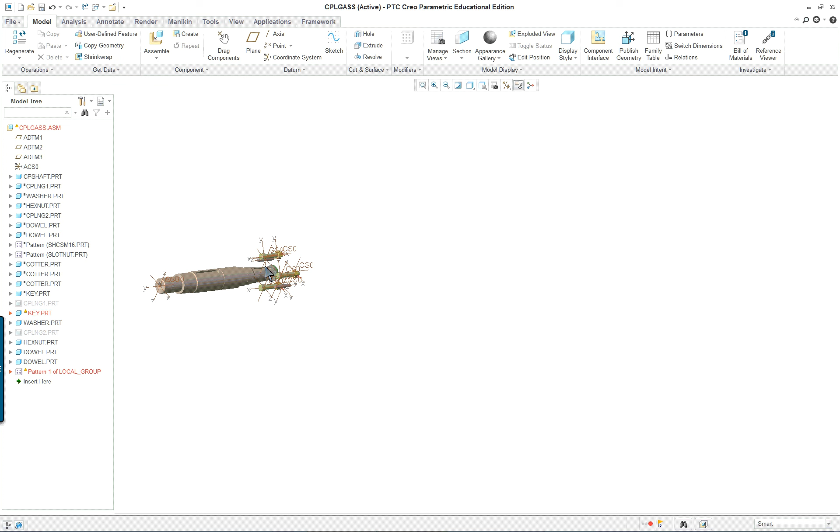Let's come off of here again. Let's go in and hide - actually, let's hide these two items. And for some reason my key has gone slightly crazy. In fact, I don't even see my key. It looks like it went and popped the other direction. I have no idea why it did that.

That one looks okay, this looks okay, and that looks okay, but I'm not showing the key at all. So let's go in here and see what's going on. Well, I can't see anything. It's not even showing up. I'm not sure what happened.

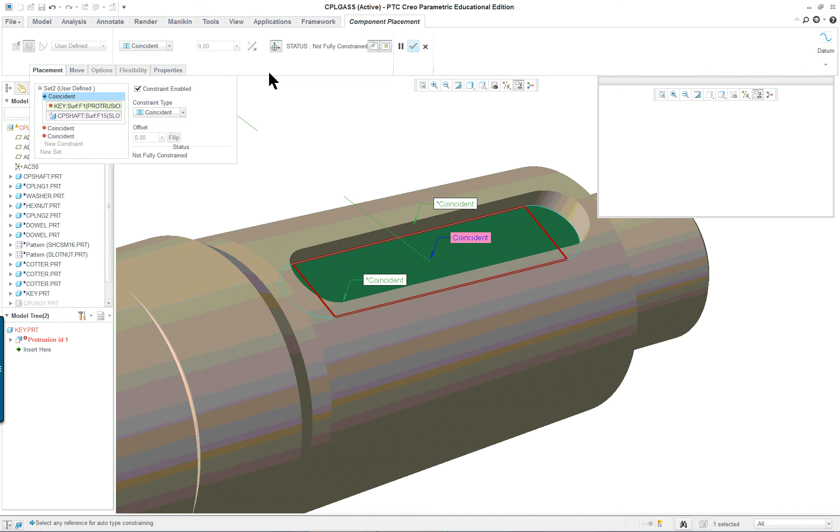So at this particular point, you'd be better off just putting the key back in. I'm going to resume this one, see what happened. I know that's cheating - I put the other one back in, but basically it's the same thing. Get rid of them and get rid of the one I stuck in that time.

Doesn't like my pattern here either. Not sure what happened with that one. All right, let's end by making sure that we have these.

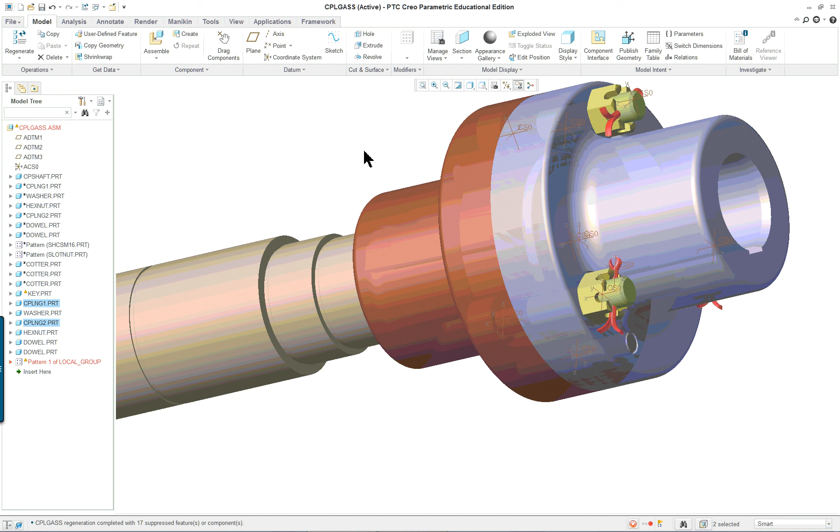You're going to want to create an exploded view to use in your drawing. So you're going to want to position it in a certain way. I have a very odd exploded view in this particular one, so it doesn't do any good.

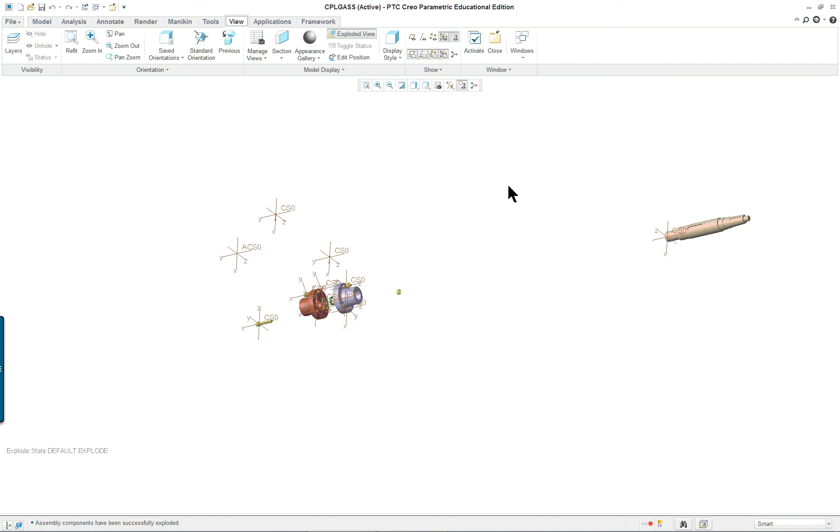I originally created this with wrong units, and I changed the units, but I didn't use interpret. I did something else, so you can see mine is exploded in pretty odd ways - that's the default position. You don't want to use that anyway.

So basically what you're going to do is you're going to create your own view, just like you did in lesson 9 in the book. Create the view that you want. Select the view, create it. Establish how you want it to look in space, and then do that.

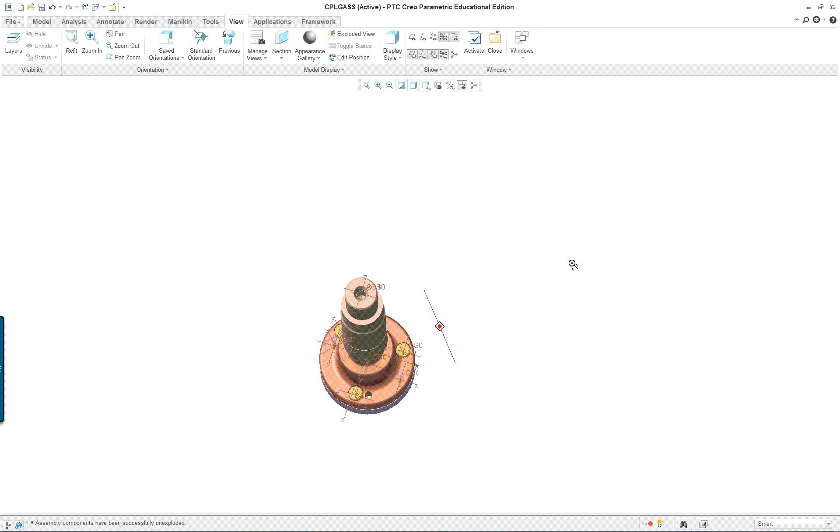And then go in and create - using the view manager, you're going to want to go in and create an exploded view, a new one. And let's go in with options and see, move with children. So click on this, see if I can get them all to move. No, everything but.

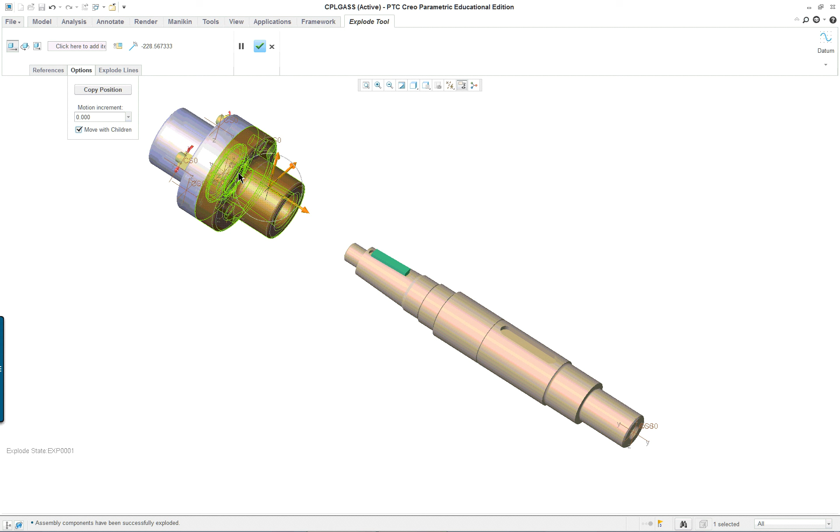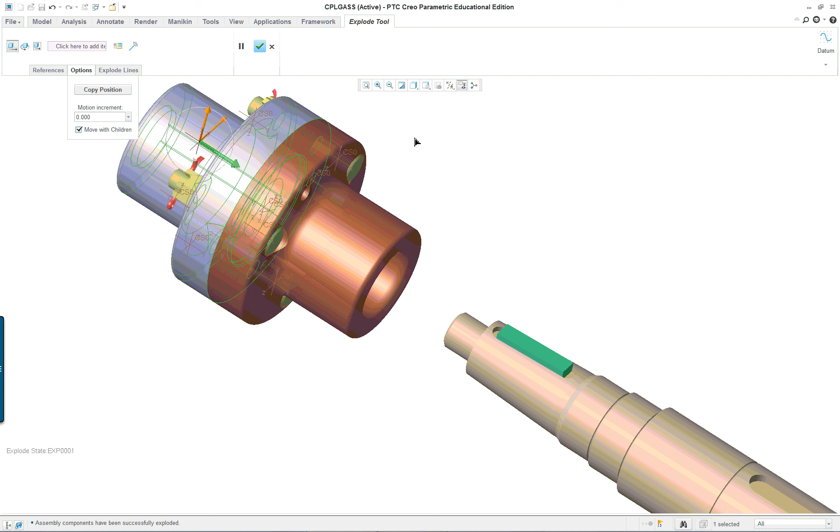My system is very slow, very slow. So you're going to want to explode this, make a really nice view.

What you're trying to do, of course, is something similar to what's in the book when you have your exploded view here, for instance, so that when you do the drawing, you have that available. This completes lesson 22.